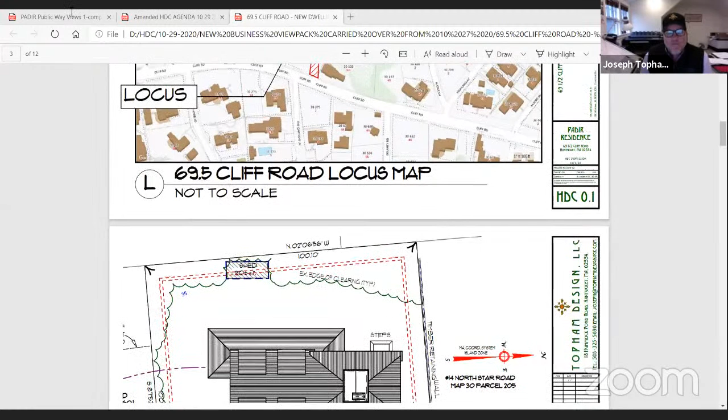Again, this is a new structure that's going to go on an existing foundation, so we're not relocating anything. We are taking the first floor framing off of the southern mass and going up with a story and a half. There's a two-story element to the rear, the north side, where the roof walk is now. That is going to go up to a story and a half or a story and three quarters.

Holly, do you want to go back to those photographs, please? So I put in a request for, hopefully, the board members could go do a drive-by of this site to show it's almost invisible. And if you made it, thank you. If you didn't, here's some photographs to help show the site. So this is from Cliff Road looking down the way, and to the right — sorry Joe, right now we're in between photos. This is about halfway down the driveway, and you still can't see the Padir house.

So this is now on the Padir. Joe, I'm sorry to interrupt, but could we go back to the very first photograph? I have to ask you a question about that one. Shoot. Holly? It's thinking. Whose screen share is this, Holly's or yours, Joe? Holly's. Okay, so this is the drive-in. So the building I'm looking at just past the hedge with the dormer with the two windows in it, is that the house?

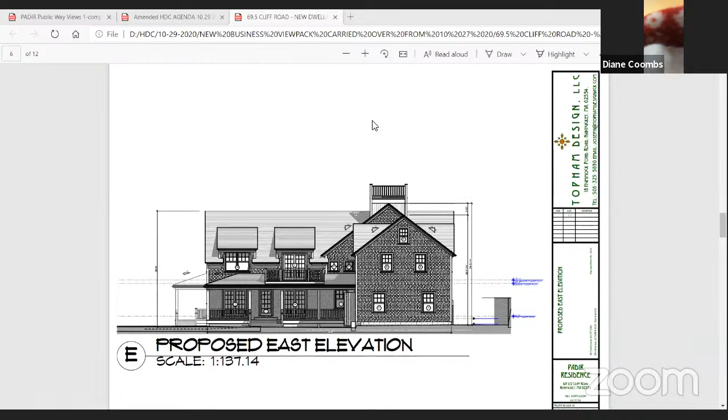So is east, other than the roof, there's no part of this that's going to be visible, right? Correct. Okay, so the windows and stuff like that doesn't make any difference. So could I go down to the next, if it's just the roof, and you're not going to see the 1.5 story because it's below the visibility line, then I don't have anything to say except the suggestion that the roof walk be removed to keep it under the 30 feet and to keep it not so visible. I'd rather see a chimney than the roof walk.

Okay, so I am going on the proposal that nothing but the roof can be seen from any direction. I think Joe's demonstrated that pretty well, and Carrie has as much as said the same thing. Right. Okay. Thank you, Diane. Carrie, why don't we check in with you? Where are you on this?

You're muted, dear. Hang on. Sorry. There you go. Okay.

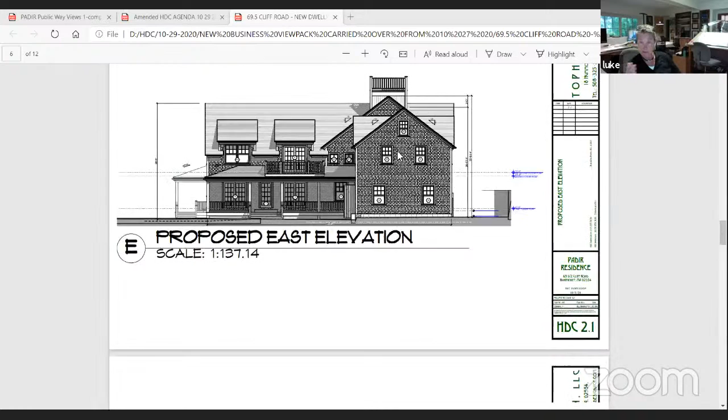I think it's a decent looking house, and even if some of it is visible, I don't see anything wrong with seeing this house. Some of the windows on a few of the elevations seem small, but again, I don't think it's inappropriate. And the house behind it, when I drove by, I went really slowly to see it, and the house behind it was standing out. So I think this house will maybe match or even still be lower than the house behind it. So I'm in favor of this.

Okay, thanks, Carrie. Abby? Yeah, I drove down here too, and I think my only objection was this elevation that's viewing now, the east, that the windows seemed sort of randomly placed. And I agree with Diane, I think the one reason the roof walk would look strange is because it is so low from other vantage points. It might look like it's just, I don't know, if you can see the roof walk, it's going to look sort of strange, sort of hanging in the air because it is so low. It's going to be at a viewpoint that's going to be strange, I think. Other than that, oh, they're not anymore.

Okay, thank you, Abby. John? John? Yes. There you are. Okay, and in looking at this, could they enlarge that just a little bit? It's hard to read the writing. Could they enlarge the photo?

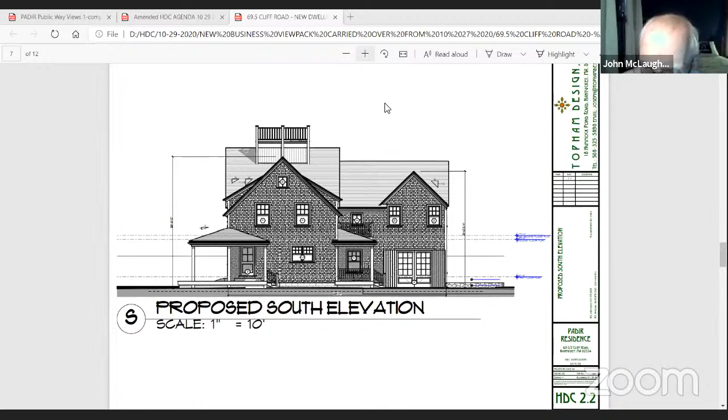Holly, we need to get you some more firepower. It seems like everything's moving in slow motion. There we go. Okay, thank you.

This is 28 foot, whatever many inches. Looking at the proposal, this structure is so much above the 7-inch minimum roof pitch. This part has to have an 11-inch pitch. You could drop that down quite a bit if you put all 7-inch or 8-inch pitches. That 2-inch makes a difference. Nobody has proposed looking at changing these roofs to a little less than what they are. That's my comment, thank you.

Okay, thanks, John. Like Carrie, I think this is going to be of such limited visibility that I'm fine with it. And even if it were visible, it's still not an unattractive building. As regards the roof walk, I think there might be a little controversy there. It does look a little odd. I don't think it quite meets the 1/3 of the ridge line criteria for roof walks, but because it's so distant, I'm not terribly concerned about that. So can somebody give me a motion of some kind on this?

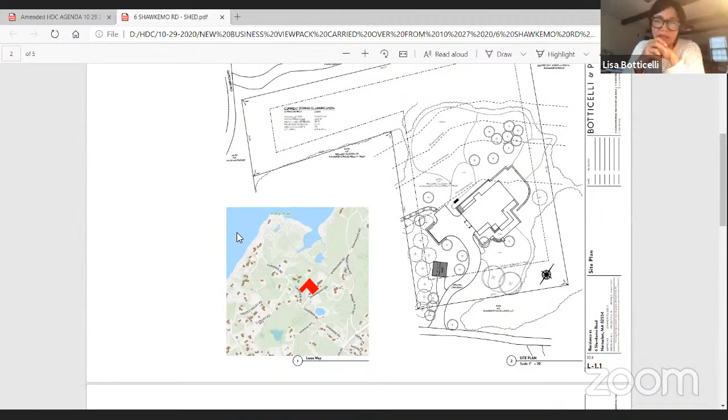Okay, Lisa. Hi, everybody. This is a very simple application, it's for a shed on 6 Shawkemo. It's a little unusual, the shed, but you approved one at 4 Shawkemo. Just to refresh your memory, Shawkemo Road is the road that comes off of Gardner that dead ends 2 doors down from this, so it's not really a thoroughfare of a road.

And the existing house at 6 Shawkemo is an old timber frame barn that's been there since - I think Design Associates built it - so it's probably built in the 1980s, late 80s early 90s. So the shed is sort of a take on that. It's a little bit more of a rural sort of lean-to shed.

Okay, I don't know if you want to go through the drawing. Can we see the elevations?

Here we go. So, Val, I'm still trying to look at it. Hold on. I think if there's no visibility, it's okay.

Lisa, what do you think about the... I'm not going to say visibility, it's no visibility, but it's very limited. I think that visibility would be very limited. You might be able to peek in there going down the driveway and see it, but there's a lot of vegetation. So if you guys wanted to view it and look at it, you could do that.

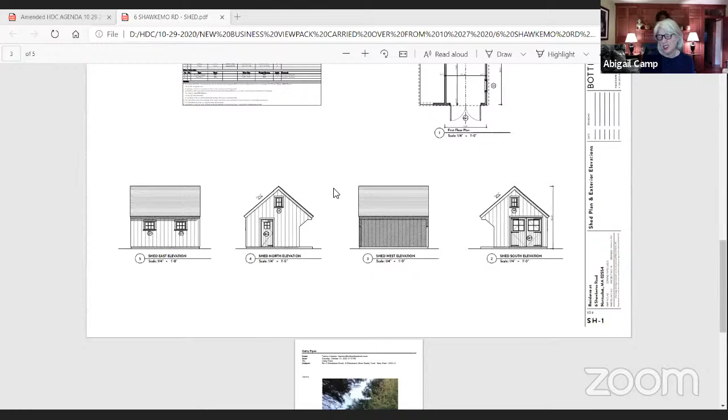Yeah, I think that might draw a little bit more attention to it. So, yeah, I wouldn't mind if it was just a regular shape. I think the lean-to - I mean, we did get the lean-to approved at the house next door, number 4. I think it's something that she's very interested in preserving.

All right, Stephen. Yeah, I'm fine with it as it is. Thank you, Madam Chair.

Yeah, okay, well I think that's fine. I think also we could have you look at it when they build it, which might be a year from now, and then talk about the detail at that point if it's really visible.

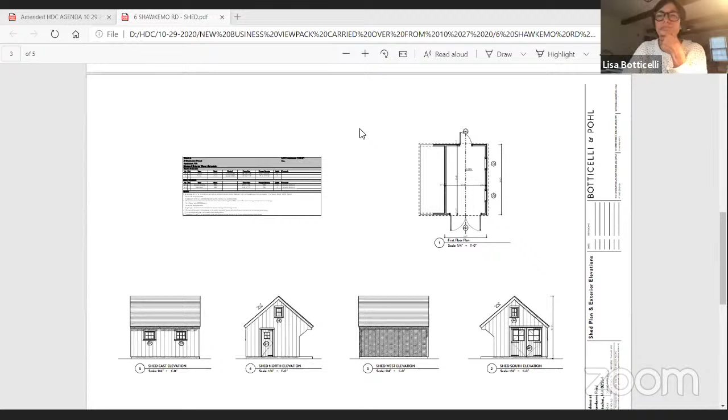Aye. There was a motion, right? Yes, so the motion passes with 4 for and 1 against. Thank you, guys. Thanks, Lisa, see you soon hopefully.

Okay, next up is 3 Brooks Farm Road, hardscaping, Scott's at Gardner. Do we have Marty or anybody on board?

Kathy? He wasn't here on Tuesday. I saw him in the waiting area, I thought I saw him. We all have bad connections today, yeah the phones are really bad. Oh, I see something that says Marty. Marty, you're muted, friend, if you can hear me. Marty? Marty, we're not getting you, bud. Hey, why don't we hold this one until we can get him on, then we can come right back. It's unfortunate because he's sitting right there. I don't know what's going on.

Thank you, everybody, for your time. So this property is at the end of Brooks Farm Road. Can we get a locus first so I know where this actually is? It's off Westchester. Where off Westchester, you know where Phil Manella's neighborhood is? No, can I just see the locus? Yeah, I just saw it in the lower right-hand corner, it's not there anymore, there it is. Gingy, Westchester, Pilgrim, okay got it, thank you.

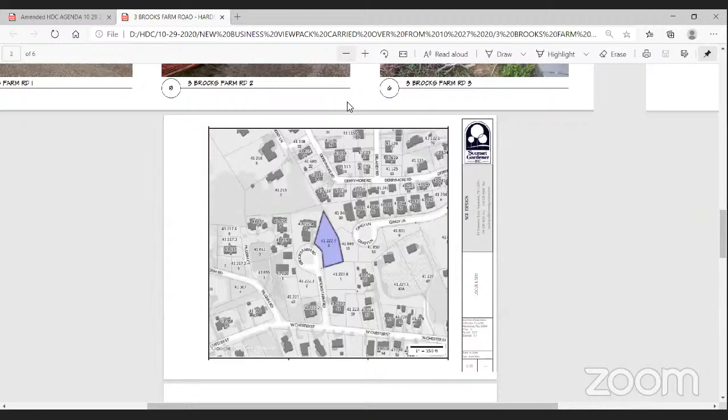Okay, so Brooks Farm Road, a little cul-de-sac off of Westchester, about 6 houses. The back of the house abuts Mr. Manella's, who is about 6 feet higher. The house we're looking at, Marty, is that your house or Phil's? That's my house, yeah, it's your house. Okay, so as you can see, it's up in the air.

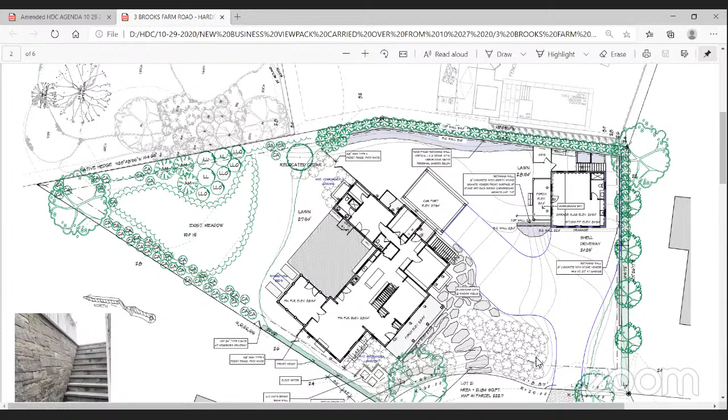I've got a rolling landscape there, covered with flowering shrubs and a little bit of grass down by the edge of the road, mirroring the rest of the neighborhood. On the left-hand side of the yard, there's a tree I'm trying to save, so I want to put some stones around it to protect the root base, using a native rubble stone. Equally in that corner you'll see the compressors illustrated, which allows me to plant that whole area out really nicely, with privet on the sides. On the right-hand side of the garage, there's a small retaining wall that mirrors the retaining wall on the opposite side in the neighbor's yard.

Marty? Which side does the retainage face - are you cutting in or building up higher than your neighbor? Can you see, in the middle photo, the garage on the right-hand side? Yes. Okay, thank you. On the right side of that there's a 21 to 24 inch tall granite wall. Is there already one there, or are you proposing it? No, I'm proposing it. But what I'm saying is, is it stepping down to your neighbor or up to your neighbor?

The neighbor - actually, their driveway and our driveway are at the same height, and they already have a 2-foot retaining wall on their side. So we're putting a 2-foot one on our side and keeping the privacy plantings that they put in. I'm still not understanding - if the neighbors already have a wall, are they lower than you or higher than you? They're lower. So the retainage is facing the neighbor? No, the retaining is facing our driveway. It would be helpful if we had some topography. Yeah, I'm sorry we don't have that right now, but the driveway they have is 2 feet below the existing grade on the property on the right side.

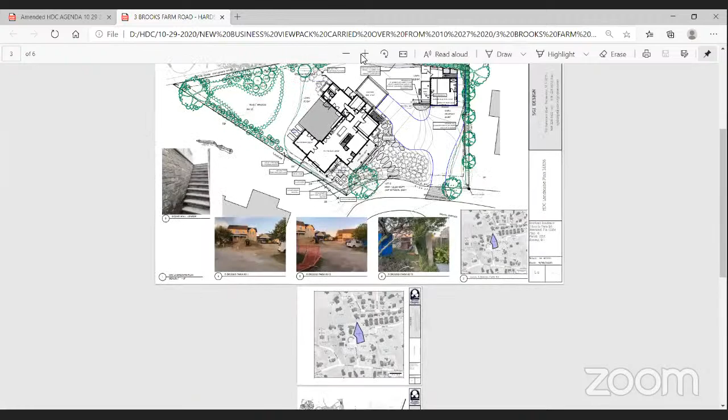On the right side of the plan, that's from where I'm looking. Can you go to the plan, please? Okay, yep.

Can I click on that, Ray? Click on what, the plan? I don't know, I think this is Holly's screen share. Okay, so Holly, where it says, I'm sorry, the plan is upside down in reverse for me.

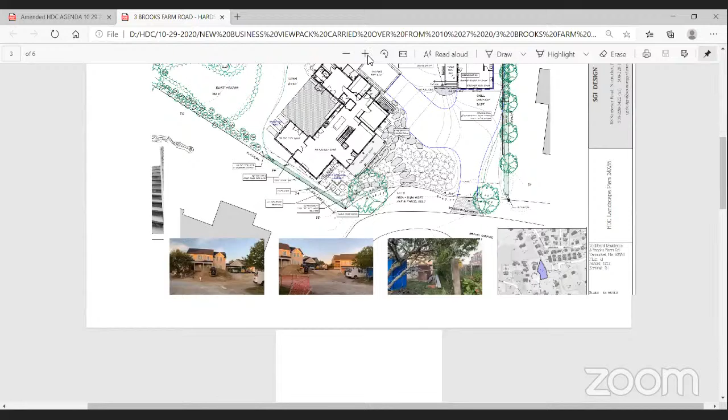On the right side in front of the garage, there's a statement. We're getting the echo again, Marty. Can you hear me now? Holly, can you please move the thing over to the left so that I can see the retaining wall? Thank you.

You see, Ray, where the number 105.72 is? Yes, okay. To the left of that there's a straight line, and that's the retaining wall. Yeah, I know where it is. I'm asking you, and I think I got an answer, that the retaining wall is facing your neighbor. No, the neighbor has another wall on their side with their house. So your retaining wall faces into your property. Yes, it's only seen from our side.

Okay, and it's 18 inches high. No, it says maximum height of 27. That's way in the back corner. Okay, all right, continue.

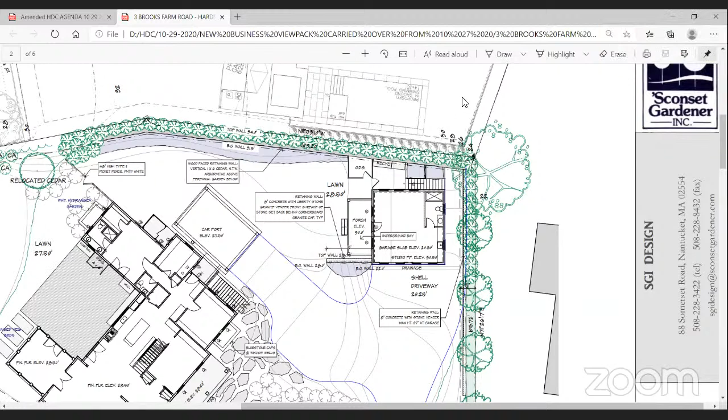Right, so your neighbor is 8 feet above you. Marty, look, I see a bottom of wall at 31.5 and a top of wall at 34. That's only 30 inches of height, not 8 feet. We're talking about the retaining wall that's right next to the garage. Marty. God.

I think, Mr. Chair, maybe we've spent so much time on this. What were you going to say, Val? I was gonna say, I know it was on the view pack, but maybe some people didn't get to see it. We could request more photos and more information, perhaps the topography stuff, and it will be clearer to us, maybe more photos of what's actually there, like on the property.

So Marty, if you hear us, I think we're going to motion that we hold for more information and another view. Okay, and can I make a suggestion? That the property behind this particular thing is up there on Gingy Lane, and it goes down, drops down to Brooks Farm Road, whatever the name of it is. Perhaps we should know that, because it must be an 8 to 12 foot drop from Gingy Lane down. It is, that's correct. Okay.

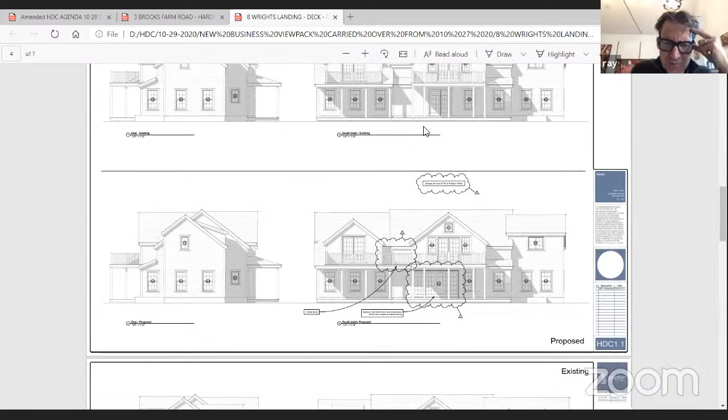Okay, so this is the rear elevation right here. We can't read any of those notations. We're attaching the 2 second floor decks, joining them, and then replacing the 2-panel French door with a 4-panel French door on the first floor. And this is all in the back, Ethan? Correct.

Well, there's one more thing: changing the trim color, joining the decks, and 2 to 4 doors, correct? Correct.

Okay, board members, I'm okay with this application, Mr. Chair. Thank you, Val. Abby? Me too. Diane? Yeah, aye. John, are you okay with this?

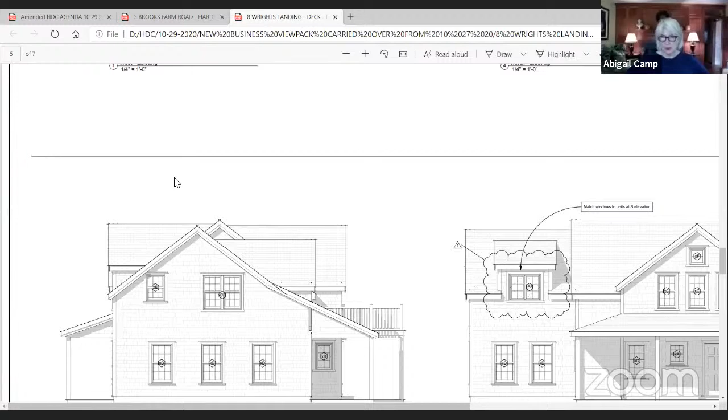The only thing I would say is the length of the second floor deck. I'd like to see the other end of it - how much extension does it come off the wall? Oh, you mean the side, from the gable end? John, that's existing. Okay, I just caught it.

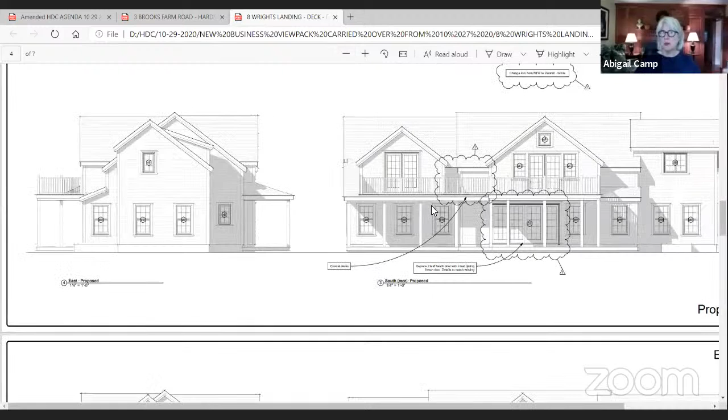All right, so can we have a motion? Val made a motion to approve. Well, I said I was good with it, but I'll make the motion to approve. On that motion, Abby, aye. Diane, aye. John, aye. Aye, I'm in favor. Okay, Ethan, that's it for you for now. Thank you very much, guys.

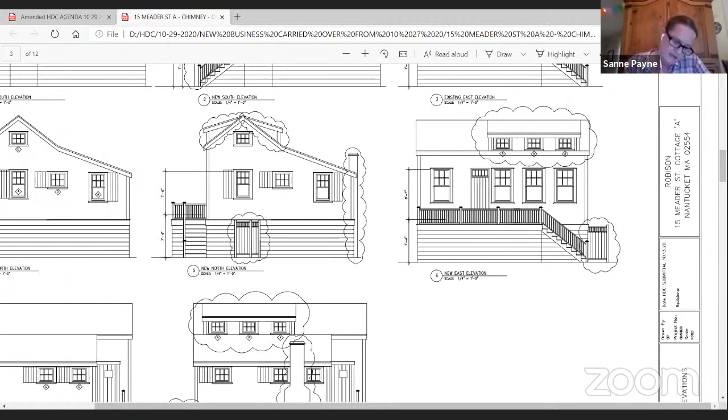Francis Street has changed so much, it's hard to think. How tall is this building? Total height is 24 feet 5 inches. It is quite a bit above ground level to start with, up above because of the flooding.

If we move the dormer on the east, then what happens to the dormer on the west? Would another cottage block off your view? It faces Cottage D, so you would be able to see it from Cottage D, but Cottage D is the same height. So all those are right around the same, within a few inches of each other. You can see it from Cottage D, but that's pretty much the only place you can see it from.

Maybe you can't see it. We moved the dormer over a little bit to the left, so it sort of matched the dormer on the east. Would it not look better balanced than leaving the dormer on the west over to the right? Leaving the dormer on the west over to the left-hand side, which is above the loft, so if the board would be okay, maybe on the east side...

Let's hear from all the board members before we get into this. I also don't see anything. I don't either.

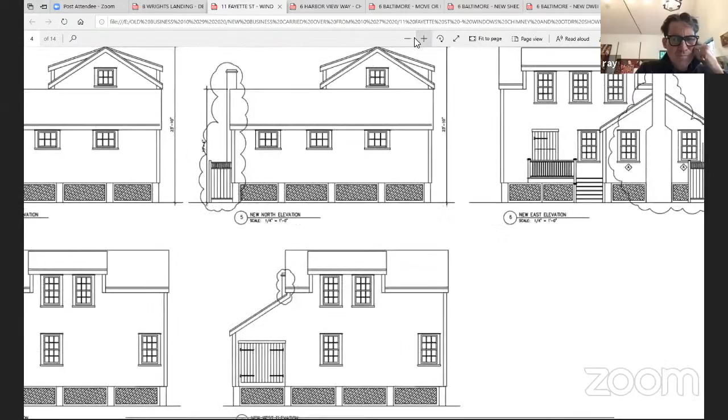Sanne, if you're going to make an argument for something else being in the way, it would be important for us to see that thing. Well, this isn't even the same plan that we were just looking at. This is different, this is 11 Fayette Street.

My overarching comment would be, all of these buildings are, first of all, raised up, as we all know. Hang on, this is Harbor View Way that's on now. Okay, here, there was Meader, go back.

Sanne, if you can hear me, you're suggesting Cottage A is the one under review, and you're saying that the dormers on the west side will be blocked by Cottage D, right? Sana? Maybe she's on mute.

This meeting is really not working. That's not working at all. Are these the cottages that they built up, we did with Paul, or? Yes.

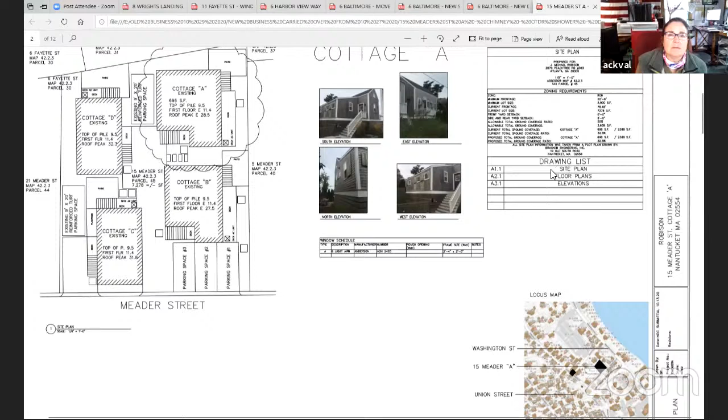They're around the corner from Diane's house. I don't see Sanne on the participants list any longer. I would just ask that perhaps we put this on hold. We're just totally wasting time here. So Sanne's exited the room.

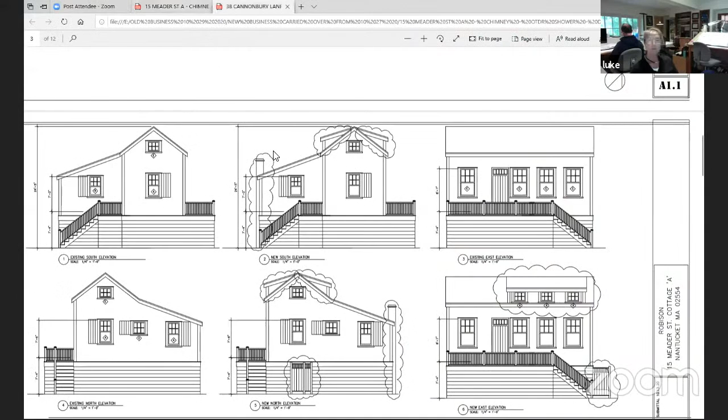This is the subdivision on the way out to Low Beach Road, which we've seen a lot lately. I have a few examples on the front page of houses in the area, and I think this house will fit in nicely. It's 27 feet tall, towards the back on the left, with dove gray trim, black sash, Harvard slate gray ICO roof shingles.

Ray, I think you've got to get Steve Welch on this. I think I've got to recuse. Oh, okay, so that's fine. Stephen, are you okay, ready to go? All right, great, thank you.

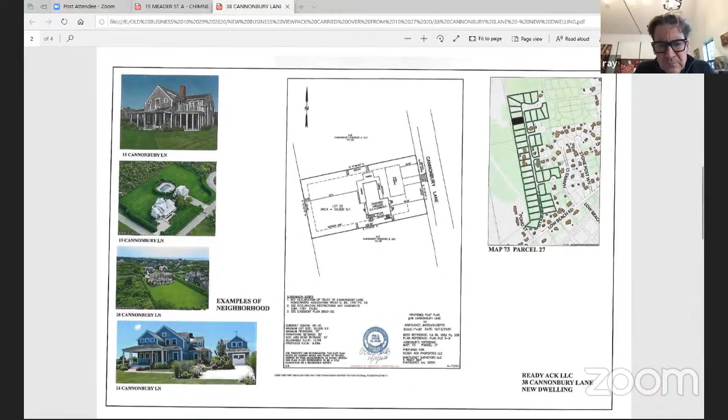Any comments from the board? What color are the roof tiles? Harvard slate gray, it's one of our approved colors. Okay, thanks. We've got to see the elevations, let's scroll back down to the elevations.

Stephen, were you about to say something? No, I'll hold, thank you Mr. Chairman. Okay, the only thing I was going to say was something about the ganged windows over the front door, but I don't really mind them. I just think they look a tiny bit odd, but that's all I have to say.

Oh, okay, and they're not actually ganged, there is shingle space between them. Yeah, I don't know, well maybe they should be ganged. I don't know, okay. Stephen? Yeah, I am fine with the application as submitted.

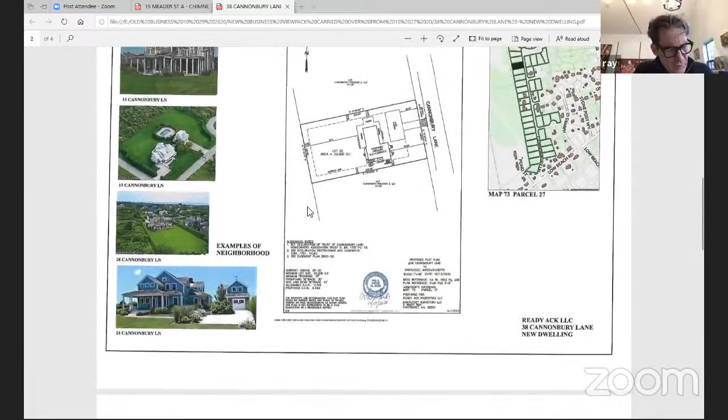Okay, thank you. John? Yes, Mr. Chairman, could you go to the aerial shot please? Sure. Right there, where it says 17 Cannonbury. Yeah, so that's not actually this house, John, that's a neighbor's house. No, I have a comment about it though. Seeing it from the aerial shot, that it's screened around the pool, so you can't see it, which makes sense. But the point is I'm trying to see, let me see where it is there.

Most pools being approved, there's no low brush there, you know, and this enclosure right off all four sides is not visible. Maybe you should do more of that kind of thing. Yeah, that's noted for the future, John.

Do you have anything to say about the house design? The house design, I can't find anything wrong with it right now. Thank you, okay, thank you.

How about you, Diane? I think he thinks the parking space is a pool. Yeah, I bet that's it. No, I think he was just making an observation that this is a good way to handle screening a pool when you get the vegetation up close, and he's correct. Anyway, I would approve as submitted.

Oh, do you want to make that motion, Diane? Because I think that motion would carry. Yep, I make the motion that it be approved as submitted.

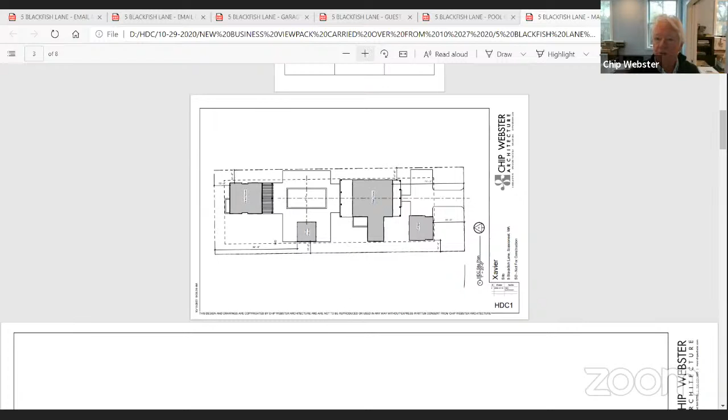On this drawing, on the right-hand side is Blackfish. So the arrangement, you can see it's a long, skinny lot. It has short frontage on Blackfish, and then it's very deep. So the arrangement of the structures pretty much has to be linear fashion because of the size and shape of the lot.

We are proposing to put the garage in the front with a side-facing door, which is pretty common throughout Sconset, in both historic applications as well as some recent approvals on new construction. That also gives us the opportunity to set the main house back a little bit more, so there's a front porch on the main house. Then to the rear is the rear courtyard bracketed by the main house and the guest house. And then there's a proposed pool cabana next to the pool. So that is the proposed arrangement.

There were some Sconset Advisory Board comments, which I'll pre-address. I'm sure Holly will read them, but one was relative to the garage being in the front, a question about that. I did, after the Sconset Advisory Board had their meeting, do a tour, and I have tons of photos which I will submit of the garage in the front. I want to point out that the garage has the door facing the parking area, not the street.

The second comment brought up during Sconset Advisory Board, if we go back to that perspective drawing of the main house, was that the door is not centered on the first floor, and that was a concern of one of the members. Again, when I drove around, I found numerous examples, both historic and new, of applications where there's a symmetrical second floor separated by a porch and a different arrangement on the first floor. In fact, that was more common than the other way. So I just wanted to pre-address those 2 comments.

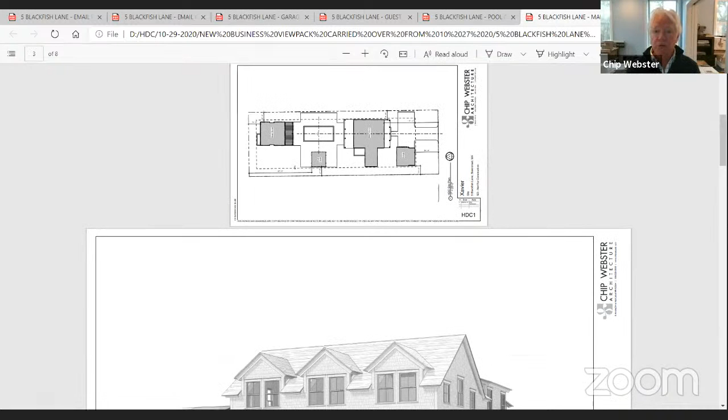If we go back to the site plan for a second, there were also 2 abutters who submitted concerns on this, and maybe I'll pre-address those as well. Both members were concerned about the amount of ground coverage on it. I'm actually glad they pointed that out, because we did a double check, and they were correct that the ground coverage as submitted exceeds the maximum.

So we have already done a redesign on a couple of the structures, the guest house and the garage, to conform to that. There was also comments from both neighbors about water runoff from the property, and we have alerted the site engineer to make sure that they are considering that.

And then one of the 2 neighbors, if we go back to the site plan for a second, are 1 Blackfish and 38 Burnell. So they're both on the same side of the property, and you can see there, right where the cursor is. And then one of them asked if it might be possible to move the buildings further from that side. So those were the comments from the neighbors.

So one thing that might speed things up today is both the garage and the guest house are redesigned enough that I think you could just hold both of those for revisions. But I would like to look at the main house and get feedback on the main house and potentially the pool cabana today.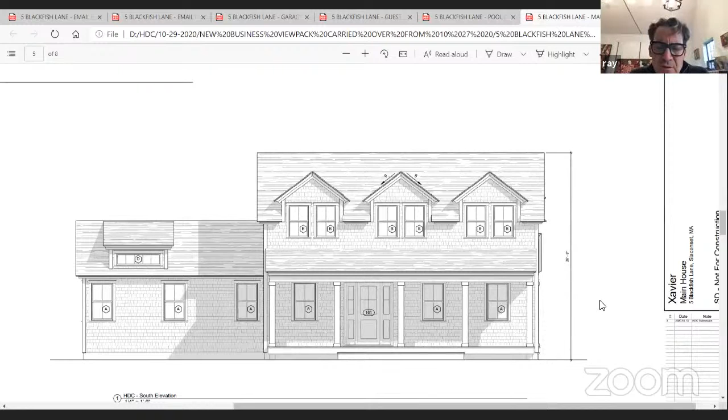Chip, did you give us the colors on this? Yes, shingles are natural to weather, red cedar roof, and white trim. Okay.

Here on the top of the page, you can see the west elevation that would be facing the sideline towards, I guess it's 7 Blackfish or whatever the next lot is that direction. And then at the bottom, you can see the north elevation, which is the back of the house. Okay.

All right, thank you. Board members. I'll go, Mr. Chair, if you're ready. Val, go ahead. Chip, nicely done, I think.

The only concern I have is the transom dormer on the side facing the street. Is there any other window type or arrangement you could pop in there?

It's interesting that you bring that up, but that is an element that appears elsewhere on another building in Blackfish, where there's a 1-story mass with the transom. So it is a condition that exists. We absolutely could look at something else. It could be a gable instead, which would tie into the other gables. It is, that's a 1-story room, a 1st floor master, so there's a cathedral ceiling there, and the idea was to break up the ceiling line and get some light in.

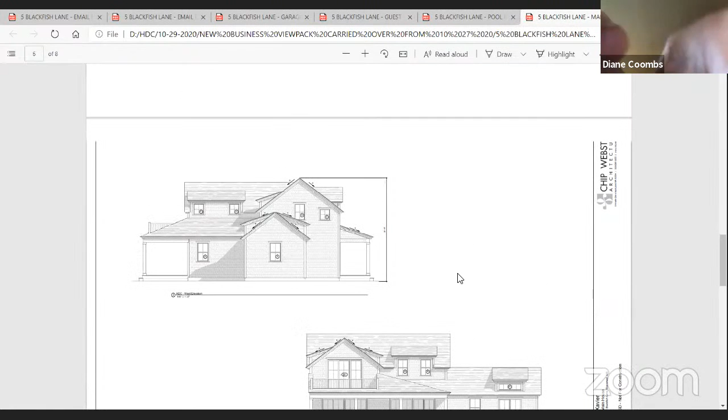I'll make a comment as to the windows that are mulled. I think they're separated, at least from the drawing, with a course of shingles coming down. So I would be the first one to leap up and down about mulled windows, but I think they are okay. I think the mulled windows on the east elevation are... I don't know. They're not typical of any window there, and you have plenty of space outside.

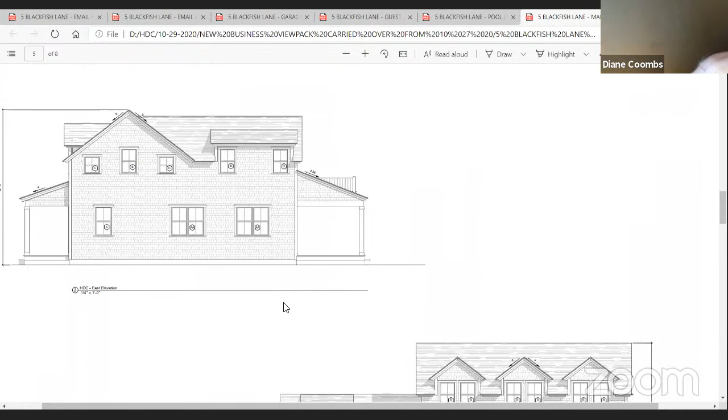I would rather see them separated along the bottom and come underneath the windows up above. I think, what do you think if you wanted to keep the little one over the bedroom, the 3 in that little dormer, what happens if you stretched it all the way out over those windows? Would that be something you could do? Would it look better than if you put a gable dormer in there, it's going to project above the roof and you're trying to keep it low. So that's just a suggestion.

I'm sorry, Diane, I might have missed that. I followed your comment on the mulled windows and then. Okay, on the south, Chip, on the south elevation.

South elevation, okay. The D window, you said that was a bedroom with a cathedral ceiling, right? What happens if instead of just having the 1, 2, 3, 4 windows, you stretched it until it went over the A window to the left, not covering it, but went over it just the way it does to the A window on the left. So it was longer rather than just a peak on that roof. Okay, I follow that. I think that we could do that.

And that might address Abby's concern that it was feeling a little small, maybe. Right. And it wouldn't project up over the roof as a doghouse would do. So that's my suggestion.

Okay, thank you, Diane. John? Yes, thank you. Is the south elevation that you have there? Yes. I think the door should be changed and not have so much glass in it, the front door.

That's what I'm thinking about. It's out of character with those side lights for that style building with those 2-over-2 windows. Big difference between them.

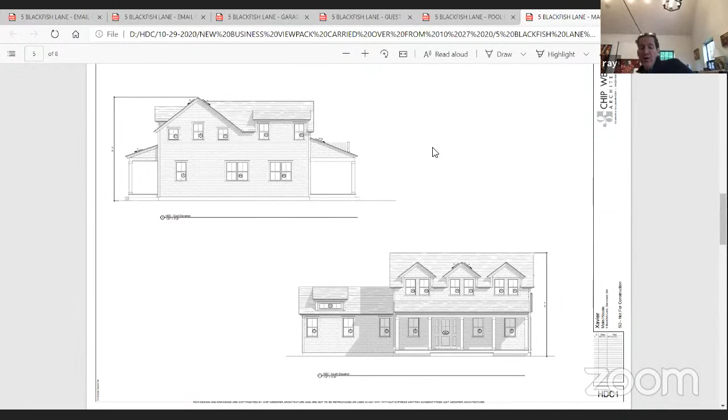Thank you. Okay, I actually agree with John on the front door. Its placement is fine, it's centered like the windows are within the bays created by the columns, so that works for me. But usually we're either approving glass in the door or with side lights, but not both. So either you have a nice big door with glass in it or you have side lights, but one or the other. That's the extent of my comments.

What would we like to do with this, folks? Hold for revisions? Was that Abby? Yes. Okay, so Abby, you've made a motion to hold for revisions. So on that motion, Val? Aye. Thank you. Diane?

Aye. Thank you, John. Aye. Thank you, Abby. Aye. And I'm in favor, motion carries.

So now remind me, Chip, do you want to hold the guest house and the garage? So items 20 and 21, can somebody make a motion to hold those for updated information?

Motion to hold. And then, if I may, it might make sense at that point to just have the pool cabana track with the rest of them. Okay, why not? So why don't we just do all 3 then?

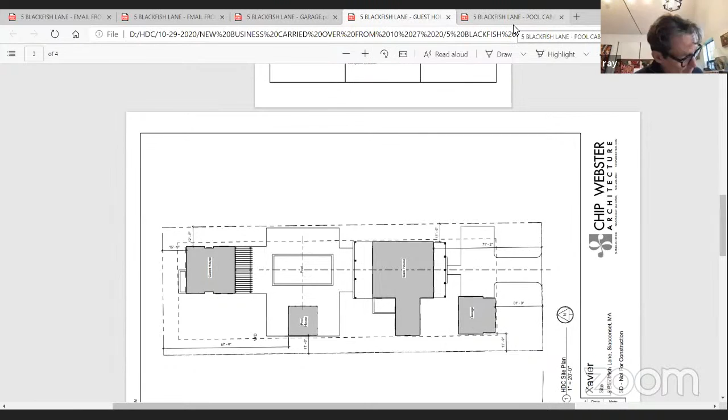Val, why don't you just do a motion that says have items 20, 21, and 22 track the main house? That's my motion, Mr. Chair. Okay, thank you. So on that motion, Diane...

Aye. Abby, aye. John, aye. Val, aye. And I'm in favor.

Okay, so that is it for you, correct, Chip, for at least now? It is. Thank you very much. Okay, everyone have a beautiful day. Thanks. And now we're on to 82 Millbrook Road.

Tori is here, she's in the building, actually, here at Plus. Hi guys, I'm here. There you are. We might be able to actually get to some of this old business stuff. That would be crazy.

Can you tell us anything about this, Tori? Sure. This might be a good place to start, at the last page of the elevations, where you can see the comparison of the garage and the main house to the proposed second dwelling as a starting point.

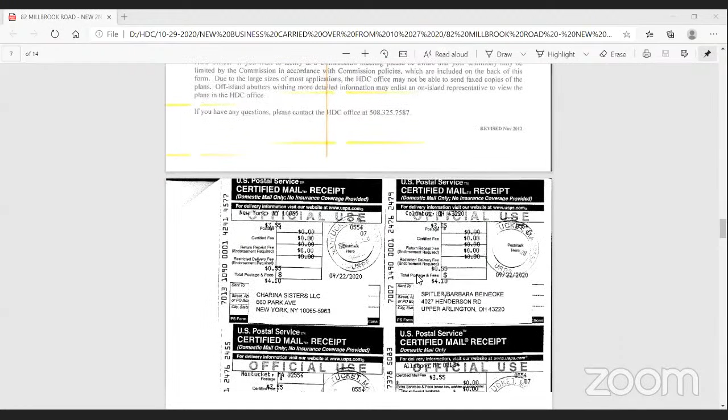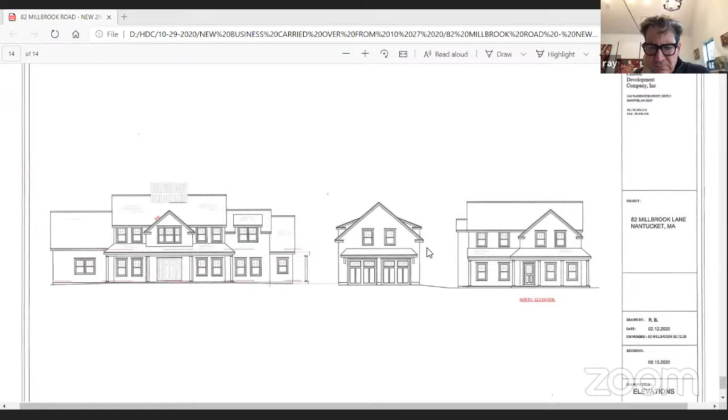So now if we'd like to go back to the site plan. You can see that we're wrapped way inside to the interior of the lot and barely visible from the main road.

Well, okay, can you explain something to me? Yep. The diagram that you just showed us is essentially like looking from, I believe, the north, looking south, which is somebody else's property, that's not a publicly traveled way. So people aren't going to be looking at it that way, correct? No, not at all. That was just to give you a reference point for both buildings that already exist on the property. Okay.

But our visibility in this case is from the east. If at all, yes. So the 'if at all' part, do you have photographs of the site and the house? I do not believe those are there. Well, you won't see the house from the east. It's actually, as you come around the curve of Millbrook Road, it's going to be from the south, if anything, the rear of it.

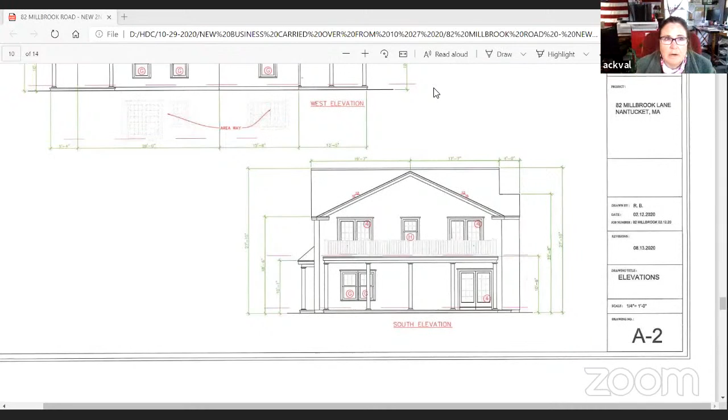I did go out and view it, and there is visibility depending on what time of year, of the structures that are there, primarily the house, not the garage. But a more overarching concern for me is that this house, a secondary dwelling, is almost 28 feet tall. I know we've sort of loosened up on our second dwelling being 24 feet and all of that, but this I think is a bit of a reach, and that also will be the part you see, the second floor level.

Mr. Chairman, let's make sure Val is finished with her comments, John, and then I'll take you. That's it for now, Mr. Chair. Thank you, Val. John. Yes.

Looking at south elevation. Okay, whoever has - sorry John, I'm going to interrupt you just for a second, somebody has like a truck backing up, I'd like them to mute. Go ahead, John.

On the south elevation that I'm looking at - could that be made a little larger? Holly, can you - oh, there we go. Okay, there we go. There you are, John. All right, now what is it?

It's got a 5-inch pitch on it. It's hard to read. 5 and 12, John. It is a 5? Yep. All right, that should be changed to a 7, no matter what problem they have to do. At a minimum, yeah, they're creating their own problem. Now, am I looking at it? It looks like the second floor deck is superimposed.

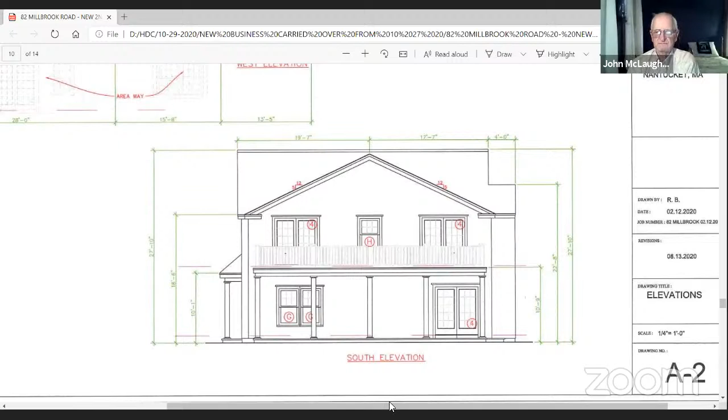I'll make a motion to hold for revision. Okay John, I'm going to hold that motion just so that if there's anything else Tori needs to hear from other board members, she's got the full package. Okay John? But I totally agree on the roof pitch and the deck. Let's see, so we heard from Val.

Abby? Yeah, having listened to everybody else, I think that roof line isn't going to work on the south. Maybe some shed dormers come down and cover the French doors, maybe there's a little one in the middle. And it sounds like you've got to bring the height down for a second dwelling - this is almost 28 feet.

Well, we're stuck on this elevation. I'd kind of like to see one of the sides, so that would be east or west, if possible please. Yeah, oh that's deep, yeah, the porch is very deep. Right, so that's got to be changed.

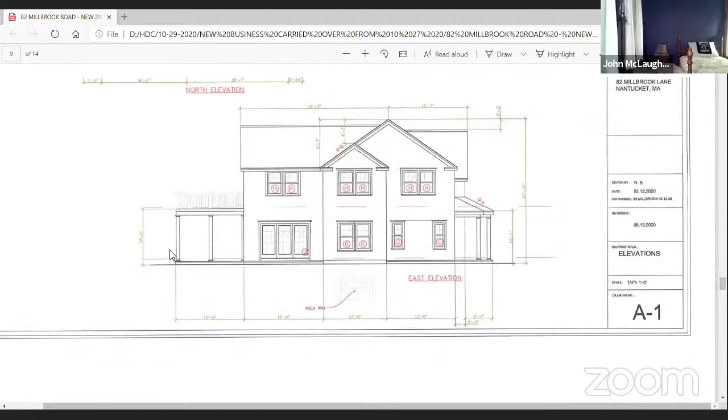I was looking at that hip roof, the way it looked from the south elevation - it looked a little steep. I don't know my roof lines on hips like that, but it seemed a little steep from the south. And then east. Yeah, someone's gonna say something about those ganged windows, I'm sure. Yeah, so, yeah, I guess those are my comments, and I think holding for revisions is probably a good idea.

Okay, and John has made that motion, so I'm just sort of holding that motion. I'd like to - yes, yes, I get - Diane. Okay, well, Abby is right.

On the east elevation, every window on the second floor is ganged, and on the first floor, and the triple French doors, and the deck above. The house should only be - and we've got to start sticking, sounded like Johnny, what he said is true - we should be sticking to 24 feet for a house that is a secondary house that is not a garage. And this is not 24 feet. It's completely ignoring our rules and regulations.

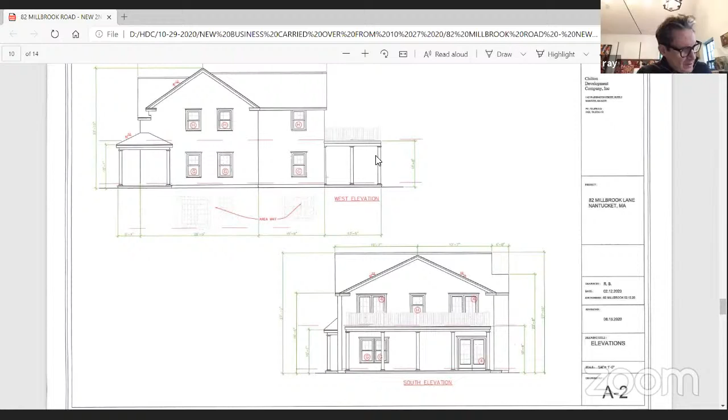Okay, so there is a motion on the table to hold this for revisions. And on that motion: Diane, aye. Val, aye. Abby, aye. John, aye. And I'm in favor. Motion carried.

Ray, could you just explain the one comment about the railing in back? Is it the width of it, or the style of it? It's the depth. But did John say something about the railing? Well, just the fact that on that drawing we were looking at, the railings were very unclear. So the line weight needs to be stronger. It's kind of a mess, yes.

It's the roof pitch and the ganged windows and everything that we said. It's the height, just trying to confirm. Okay, we're moving on to another application. Thanks, we're on to old business.

21 Hummock Pond Road. It's myself, Diane, Abby, Val, and Carrie. Okay?

Hello. Hi, I'm Pete Sendelbach. Should I present it? Can you hear me? Okay.

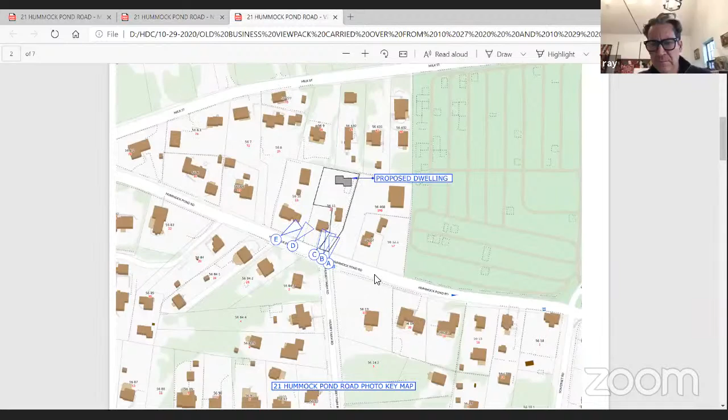So I think it's safe to say that it's not visible from A, correct? Well, that's the view coming up Hussey Farm Road. For B, you can just see them from this view, either side of the chimney on the garage there. Wow, it's pretty far back. Okay, those are your two ridge poles, correct? Correct. Okay, very good. Thank you.

Okay, there's our—that's the same chimney, correct? Correct. That's a chimney on Milk Street Extension there. Right, so the poles are somewhere over to the chimney that's just barely peeking above the privet. Yeah, they're kind of behind the chimney there. Okay, all right, so that was C. How about D?

D. Thank you. That's nothing there, right? Yeah, I can't see them there. Okay, E.

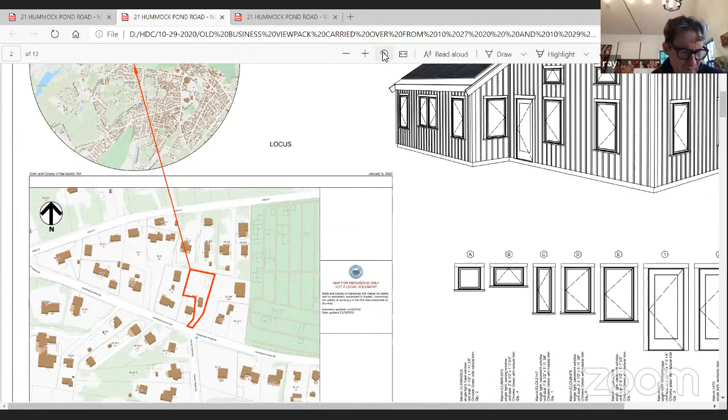So I would want to see it shingled. And I guess the solar panels are on the side facing away from Milk, so those would be the least visible in that spot, so those are okay. So just to reiterate, Val, you just want to see it shingled instead of vertical board? Yeah, and it's all casements. I think that in its entirety, it's an anomaly. Yeah, and it is—so this would be, due to limited or lack of visibility clause, I just would be concerned about all casement windows and the precedent. I think you can still get a net zero house and use typical materials.

What about the solar panels? I think where he has the house, the garage, and the other house, this is probably the best place for them, although it's on the front of the house, which we don't typically like. That I do believe is limited visibility.

Mr. Chair, point of clarification. I believe when this was last reviewed, you all discussed that it would be a separate application for the solar, that this is just for the house. Yes, that was true. Thank you for that.

However, I will say for the record, Val's point about two things: one, you have a black roof, which we're always looking for; two, they're behind the garage. So I don't think there's going to be any difficulty. Oh, they also occupy the whole roof plane, which is a third thing we're often looking for. Thank you for that, Holly.

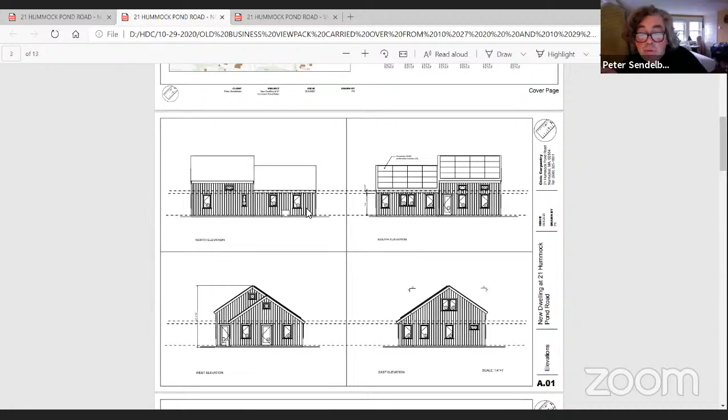Mr. Chair, I think respectfully that Val is probably mistaken about it being visible from Milk Street Extension. There are a lot of houses in the middle, and I've lived there for 12 years. I'm pretty positive there's no way to see this from that direction. Yeah, I would tend to agree. And it's really low.

A thousand feet away, I mean, or more. Can we see the locus map to see how far away this building is from Milk Extension? There you go. So Milk Street is the road. Oh, there you go, there it is. Right, thank you.

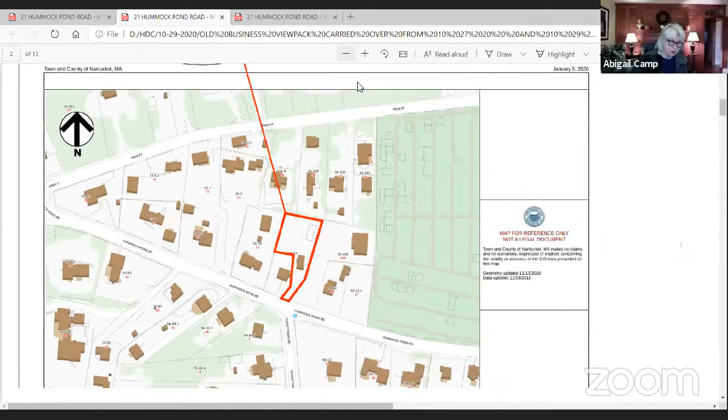So I'm fine with it. I'll make a motion to approve and see what happens. And could you just say that we're approving this with the understanding that the solar panels will be a separate application? Absolutely. It's a nonconformity due to lack of visibility, which means we'd have that caveat of, at the time of inspection.

Mr. Chairman? Yes, John. All right, I'd like to make a comment. Go ahead. This structure, as I see it drawn, I find the window considerations part completely inimical, and it has nothing to do with the present existing surroundings, which is say 400 to 500 feet from this structure where we propose it.

As it's outside of the HDC area, but I find that to approve this thing out there, you're going to start a precedent anywhere on this island, it's going to look like that. And that is not Nantucket, that is not Sconset, it's just not Nantucket. And I'm not in favor of any... I am in favor of some changes on this to make the size of it. What?

What did you say? I said you're not on this application. Oh my gosh, thank you for pointing that out. Yes, John, you are not on this application. Thank you, sorry about that. No, that's all right, you're right.

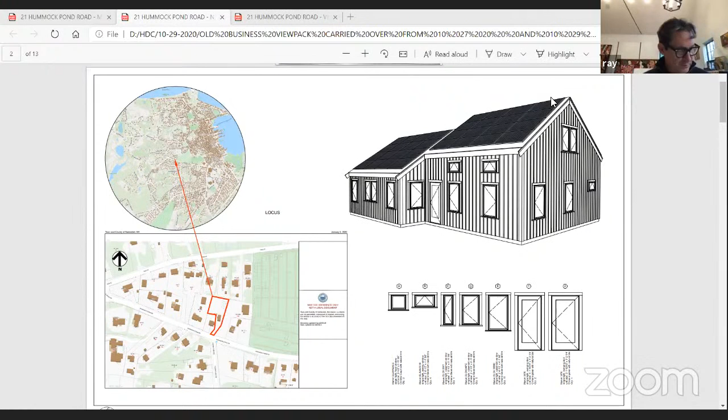Can somebody give me a different motion please, don't take it personally. Make a motion to hold for revisions. Okay, let's see how that goes. Carrie, aye. Val, aye. Abby, aye. Diane, aye, I'm in favor. Okay, so looking for some revisions.

Next up, solar panels, 83 Eel Point Road, myself, Diane, Abby, Val. Let's go, I'm running out of steam. All right, can you hear me? Can you hear me? Yes.

Okay, good. So when this was originally heard, I contended that the visibility would be low or not at all from Eel Point Road due to the new black asphalt roof, and the fact that the house is one story and 300 feet from the road. There's already a natural vegetative buffer from his driveway to the west, and we offered to add the same type of buffer from the driveway east, as well as plant a few evergreens to block any visibility from the road.

It was held for a viewing and we came back, but then no one had viewed it. And at that second meeting you requested a string marking the height of the proposed natural vegetation that would be placed there to block it. The string was put up, so I'm not sure if anyone viewed it.

But before that, I wanted to speak to the point that you raised, that the area was completely flat and any kind of berm would not be natural. Just to the east of this property is a dune, a big undulation that's over 25 feet high, higher than the height of the house. So creating a berm or high vegetation really is in keeping with the natural landscape. So again, it was held for a second time for a viewing.

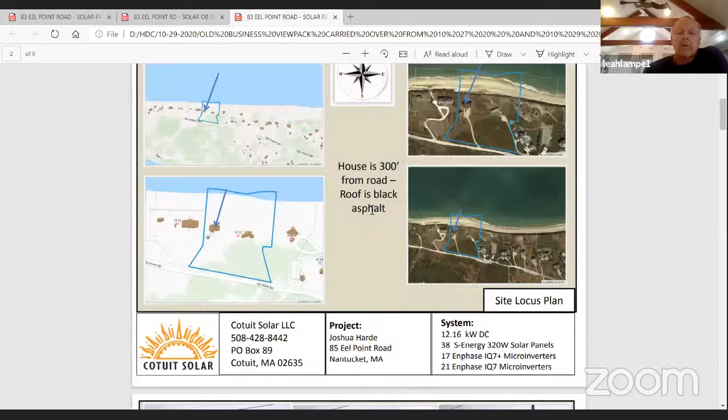It would have to be on the front of the house because that's the south, or we could do a ground mount, or we could screen it closer. You could come back with another application. But can you give me some guidance where you would want to see it? I would say wherever you decide to put it should have some screening that blocks the visibility from the road.

And did you consider doing something like a pergola? We've seen those done before and they're inset. So you're talking not on the roof, is what you're saying?

Well, I think a ground array with screening around it. Okay, I mean, that's my view, my vote.

Okay, so berm something? They could berm in front of it or something. Well, somebody on the board told her not to berm because that was artificial, but okay. I'm not sure that I agree. But even if you didn't berm, you could always vegetate with evergreen material. So let's hold this for revisions, okay?

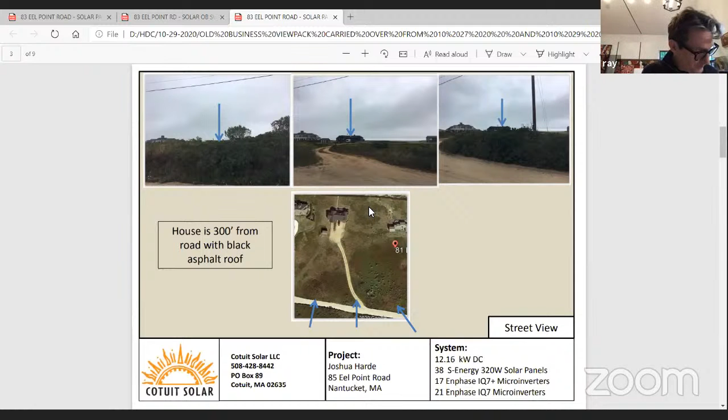Motion to hold for revisions. Thank you, Val. On that motion, Abby? Aye. Diane? Aye. Val? Aye. I'm in favor. Okay, that's that.

John Lampe, 10 Delaney, Lot C. Am I on? Can you see me? You're on, yep. Okay, so if you've forgotten, John, the board is myself, Diane, Abby, and Val, and that is for all three of these applications, okay?

All right, let's go. So I'd like to begin by discussing or addressing the neighborhood context for this application. Good. I'll express, I had sent in some photos way back in September, but for whatever reason, we didn't see them.

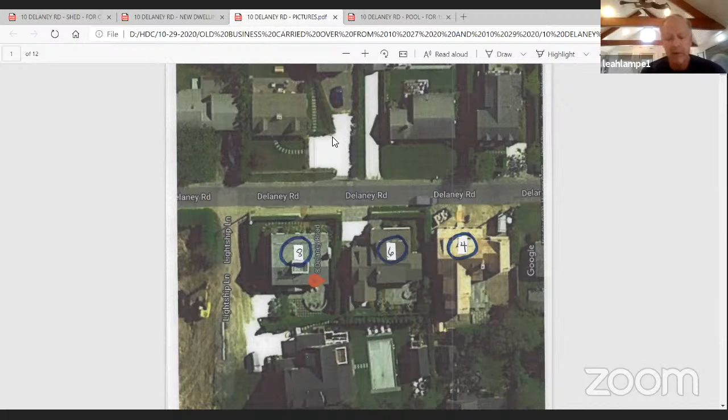So number one is a Google map satellite shot of Delaney with number 4, 6, and 8. And you can see that they're pretty tight right in there. These are particularly, well, you can see that 4 is brand new. And as we scroll down further, let's look at the first 3 Google satellite shots.

So that is 14 and 16 Delaney, which is 2 houses away from 10. And in particular, you'll see later on a shot of 14 because they have now built a home on number 14, which was just completed about 1.5 years ago. But that in particular is really, I think they've used up their entire ground coverage less 1 square foot. And we'll see that a little bit further down the line here with the photos.

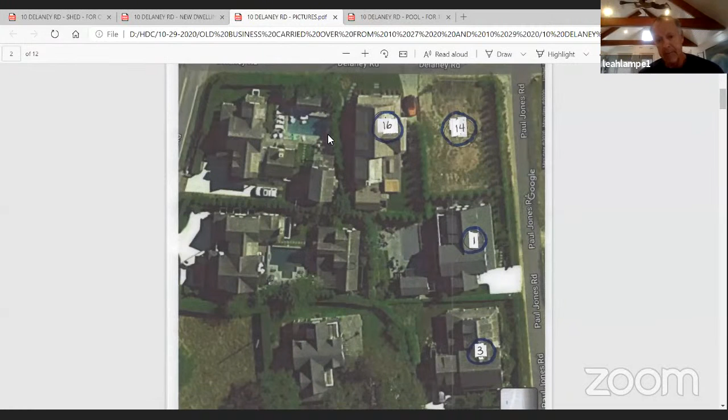And then as well as 1 and 3, they're all pretty new homes. And, you know, the neighborhood is kind of in transition. And the new homes are all, you know, they try to utilize as much of the ground coverage as they can. I mean, they don't use the whole thing, but certainly number 14 did. Gingy Lane, you can see there that those homes, which is like 6 houses away from the site going south, and all those are pretty well tight as well.

So to give you some photos of the homes on Delaney, if you move down to the next shot there, Holly, number 4, that's pretty new right there. And I didn't get the as-built of this one, but it's very close to the side setbacks. Moving on to number 6.

Next photograph, which is 6 Delaney. That one's pretty doggone tight as well, but this is also just to give you perspective of the homes in the neighborhood. Next one. Number 8. We do have an as-built. I should have included it in with this stuff, but they are right against the Lightship Lane. That's the one I just completed.

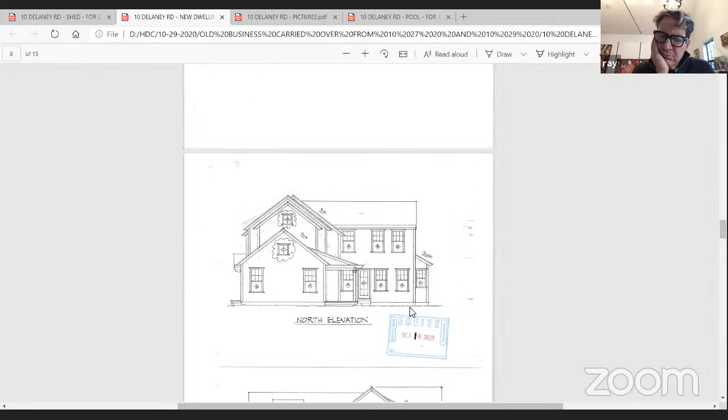So on the east, the clouded windows were both ganged, so I moved them apart. It's the second story one, a small room, and I've spread them out as far as I can in that area. The ones below were the kitchen, and that was easier to do.

So, to just refresh your memory, I moved the house more to the center of the lot, gaining 3 feet. I was on the east lot line, right up against the setback, and now I have 8 feet instead of 5'3", I think it was. And then I might point out that for this lot, I've utilized only 79% of the allowable ground coverage.

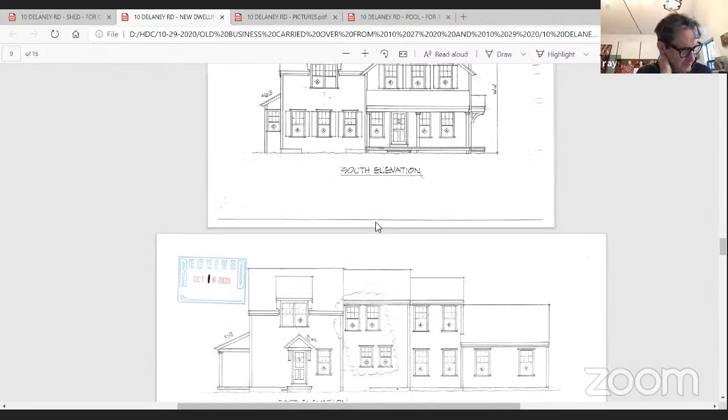I think what he's done is good. I like the windows in the north elevation. If those windows in the elevation Abby was talking about, the east elevation, I wouldn't mind those windows together if they were in the center, but that's a bedroom, you said, so you have to put windows over there, right? That's correct. Yeah, I agree with you totally. I wish I could.

I don't know, well, you could try them back to being mulled and see if they have the two on the top mulled. It's just that no way is one set over the other. Maybe a single window in that room, get rid of that window to the left and keep your single window up there. It might work out better. It's just sort of screwy, and I think when you drive by and look at it, you might think they made a mistake. Not that I don't love your stuff, John, but that set of windows disturbs me. Other than that, I appreciate you moving it, and that you're down on the side to side and back to back. I have no other bad things to say.

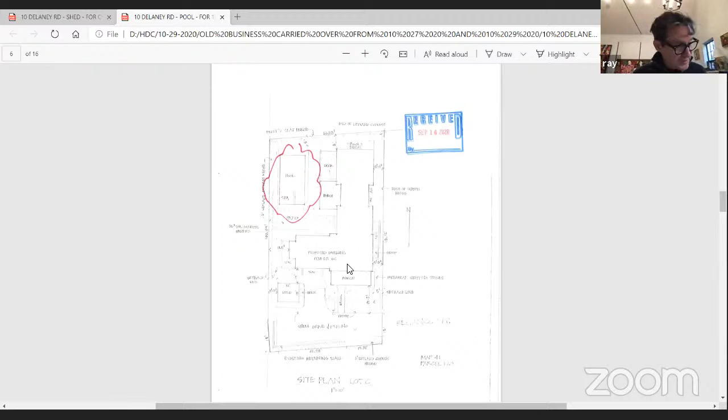Mr. Chairman, yes John, am I sitting on this? No, John, we're on old business now. I don't know whether you have your agenda in front of you, and I'm looking down because we're going to be breaking in not much longer. John, you're not on any of them. I'm not seeing you on any of the ones we're reviewing today. If I am, I'd like a comment. What's that? If I am on it, I have a comment. Well, no, John, what I'm saying is this is all old business, so the boards are already established, and I don't see you on any of the applications. Okay, no problem. Thank you. All right, okay.

All right, so the pool. Go, John. So the pool, I guess the biggest thing is that it has an automatic pool cover. Right, so how are you screening it? No fencing required, how are you screening it? And it is completely screened with...

Leyland cypress trees. You mean that exist now, or that you're proposing? No, they're proposed, this lot doesn't have anything on it right now. Those Leylands on the left are existing, as you begin to go down this private access area. Oh, those will be carried pretty much around the entire lot I'm talking about. Okay, that's unfortunate. Yeah, well, I could change it. Well, the board is getting a little tired of looking at Leyland cypresses, and they just tend to grow in a perfect line.

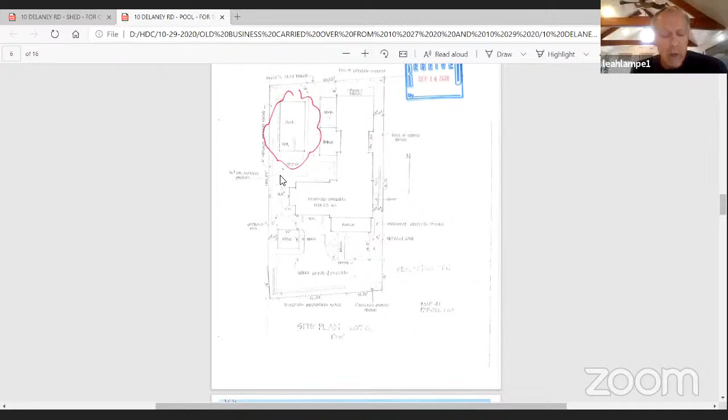Yeah, I had one earlier rendition with... what are they... Rose of Sharon hedge. Yeah, but Rose of Sharon loses its leaves. Yeah, I know, it's deciduous.

So let's hear from the board, John. Okay, yep, it's the same board that just reviewed your house. So we're going to go to Abby.

Well, I'm not in favor of a row of Leyland cypress. There's not another place for this pool, and it's already sort of... what are the dimensions, John? It doesn't look that big, but. It is 14 by 26. Yeah, that's the way we've been seeing them come in. That's a smaller size, so I wouldn't ask you to shrink it.

Deck, porch, you could put a board fence up with privet. Shoot, and which side would you put the board on? The board would have to go... well, there's one already on the north property line, and I would put it there. Oh I see, existing slat fence. That's an opaque board fence, John? Yeah, I might want to upgrade that with the lattice rail on the top, make it look a little bit better. But I could do some kind of 6-foot fence with privet on the west and north.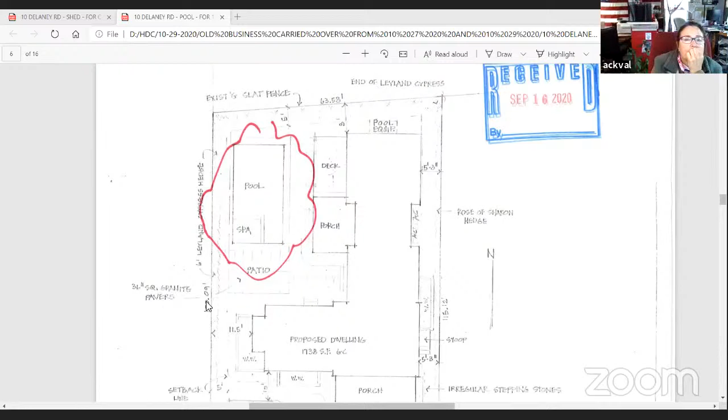Okay, so make a motion for me, Abby. So the motion is to have the slatted fence that's already existing come down that western side and stop at the edge of the dwelling, roundabout where it says 60, where that decimal point is. Correct, and then that just becomes a hedge after that to the road. Okay, privet just to the road. So that is your motion? That is my motion. Okay, on that motion, Val? Aye. Diane? Aye. Abby? Aye. And I'm in favor. Motion carries. Okay, let's look at the shed.

What is John McLaughlin laughing about? I know, I've seen him, when we started the meeting he was laughing at something. I think he's in a good watching mood. Cartoons, maybe so. We'll have to ask him.

So there's a small shed. Okay, let's take a look at it. I don't believe this should have even been reviewed or discussed at all. So John, which side of this faces down the drive? Well, that would be east. East, okay, so you're looking down the drive at a little gable with a front door on it. Correct. Okay, thanks, we'll probably be putting a trellis on this thing, that's particularly fine on the south side.

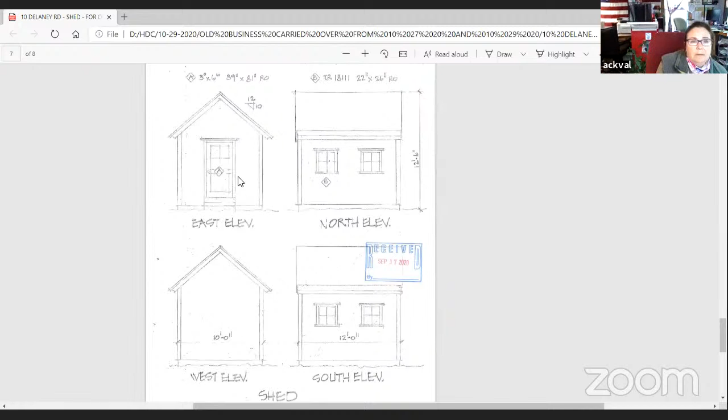Comments from the board? I would motion to approve this shed, Mr. Chair, as submitted. If anybody has any issues, it can happen during the motion, but on that motion, Abby? Sorry, I was just trying to look at the site plan. You've got privet along the front of it, John. There it is, existing retaining wall.

Yeah, well, I guess you're not going to see it. Is that correct? There's a retaining wall. I think you're going to see, no, looking down the driveway, you're going to see the corner of it. Yeah, okay, all right. The driveway's on the right. Sorry, the driveway is all along the bottom, yeah. Okay, I'm fine with it.

Okay, good. So you're in favor of Val's motion? Yes. Diane? Aye. All right, and Val? Aye, okay, I'm in favor. That motion carries.

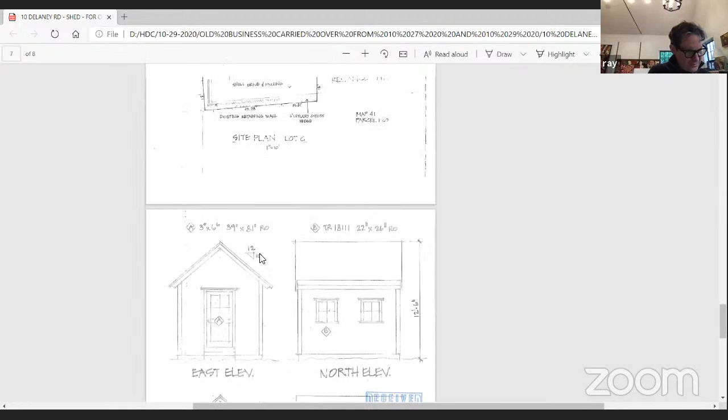Is there an easy one? There's no such thing as an easy one on old business. Why don't we, well, okay, let's just keep going and see how we do. Okay, ACK Smart, 132 Main Solar, let's go.

Hey everybody, can everybody hear me? So this board is slightly different. This is myself, Diane, Val, and Carrie. Okay, let's go. So can everybody hear me? Can you hear me, Mr. Chair? Yep, awesome. So last time we spoke about this project, we were asked to go back for revisions and

also put a mock-up on the dormers, which we did. And we put the mock-up on. I don't know if anybody went to see the mock-up, but I did take some pictures. We just saw the photo. Yep, and we also did a couple of other things. We have moved the panels on both the west and east dormers further south so that they would have even less visibility from the main road to the north.

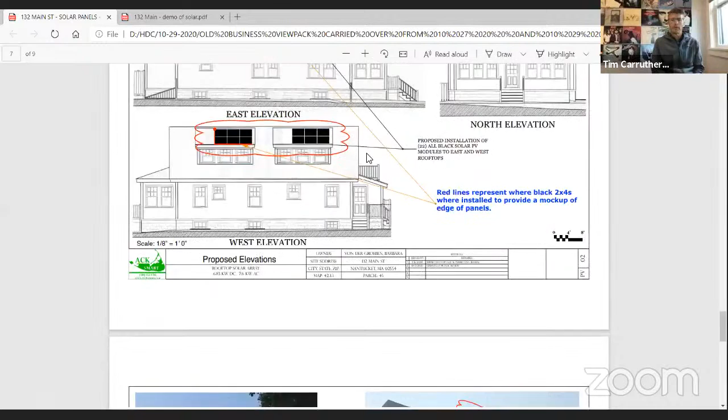So if you scroll down. Keep scrolling, I think it was a sunny day when we took the pictures. There we go. So the mock-up that we did was on the northern and side edges. We put up 2x4s painted black to simulate the profile of the panels and railings.

The other two things that we're going to do slightly differently for this project is we're going to be using a low profile rail. And since we last met, we spoke with the owner, and she is in fact going to put black shingles on the dormers, new black shingle roof on the dormers.

Just on the dormers? That was the discussion that we had, yes. That would be interesting, so you'd have two different roof shingles on your roof? Well, I think that this was driven by, it is black, but we recognize that because the roof is 15 years old, the black has faded somewhat.

Well, I guess my point is the reason that we are looking for a black roof for the panels to go on is because then everything is black, so that you don't just see black panels. So the fact that you're taking the part that already has the panels on it and turning it black, but nothing else black, is sort of defeating the purpose of the roof being black, if you know what I'm saying.

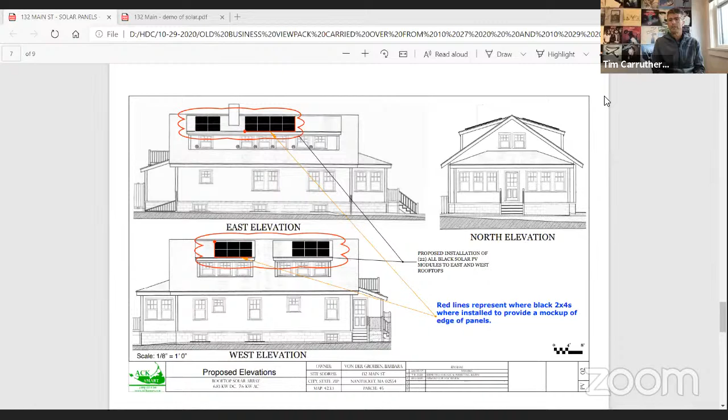If you scroll down to the next page, you can see that it's actually extremely difficult to see. It's funny, but you can see it, and that's why I was asking about moving them up, because the further away from the eave they get, the less of that you're going to actually perceive.

Yes, so a few things. Thank you, Tim, for your presentation. Holly, were you going to say something about HSAB just a minute ago?

Yes sir, HSAB did take a look at this. And they did take a look at the view, and they did say that the 2x4 was visible during the view. They recommend a setback of 1 foot off the eave line if possible. Also to stand off the section to be constructed so the panel is no higher than 2 inches off.

I guess on the specs, I think is where it was indicating. Those were their comments, so. Okay, all right, thanks. Okay, board members, and you know who you are.

Val, should I start with you? You can. I'm struggling with this because of the contrast of the roof and the panels. And I do appreciate, thank you Tim, for the offer of the black roof. I think maybe for me, if the whole entire roof was black, I could be coerced into an aye, but as it stands, I'm still a no.

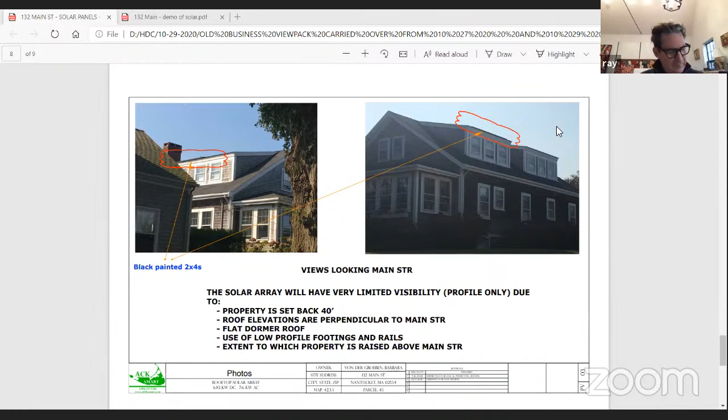Okay, that's great, thank you Val. Diane. Refresh my memory, why is he putting them on an east dormer?

Well, because the ridge runs north-south, that means his only exposure is going to be on the east or the west. I just wondered how much sun he was getting on the east to begin with. Well, it's a fairly flat roof, so the sun will be pretty good. The fact that it's a flat roof works to the advantage of getting the sun and also making it more hidden from Main Street.

Okay, I couldn't remember, I remember you had said it before, but it had gone from my mind. I think it's important, I've said before and other people have, that we do this according to our rules that govern the solar panels. I think if it moves up, I don't know from your drawing how much upper you can make the west elevation or the east elevation. It looks like if they fill the entire dormer.

So I have a question. I guess I would like to see how you are going to do that, in as much as HSAB and we have asked that it be moved up some inches so it's not visible from the edge of the roof. That's it, thank you Diane.

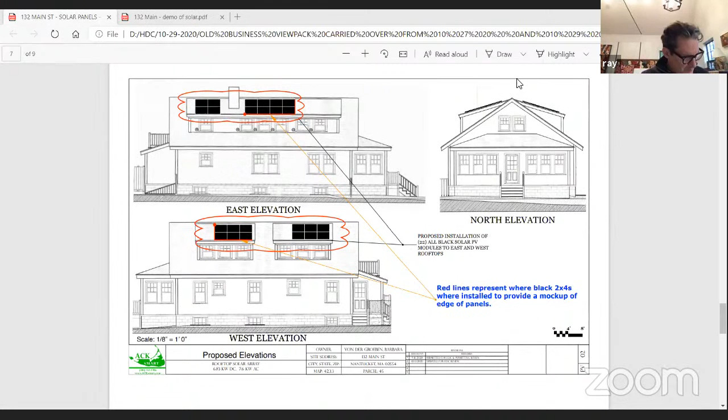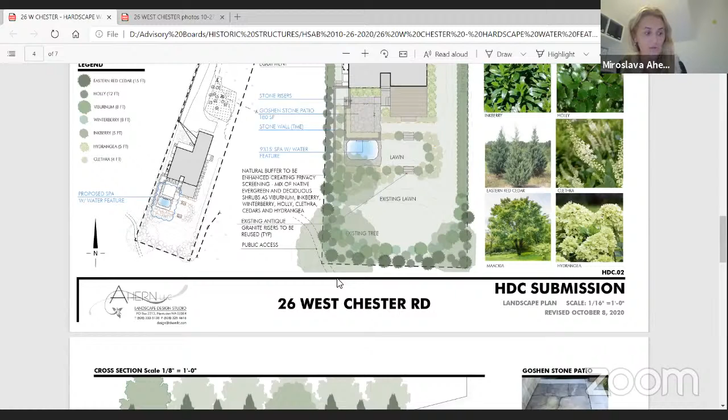I did a little research on the southwest corner. There are two lines — that's how right now the public travels to the lily pond. I did a little research, and there is no real easement on this property to access the lily pond. This is something the public just got used to, but it's not on any record, not on a registry of deeds or the Bracken survey plan. So I just wanted to point out that this access is more like trespassing — it's a public access which my client doesn't mind, but it feels a little harsh to say it's visible because people have access kind of walking through their property.

In addition, I just provided more cross-sections illustrating the planting. It's more in an illustrative way, but I just really want to show the layered volume of the planting, and again using the Goshen stones as an irregular organic material.

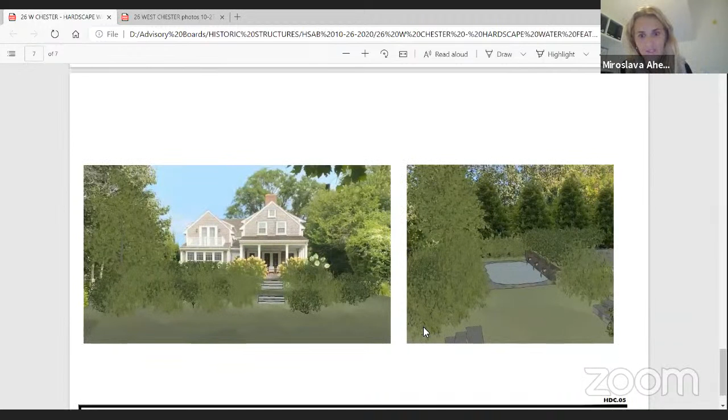I think that's all the comments or the changes I've done. Okay, okay, thank you.

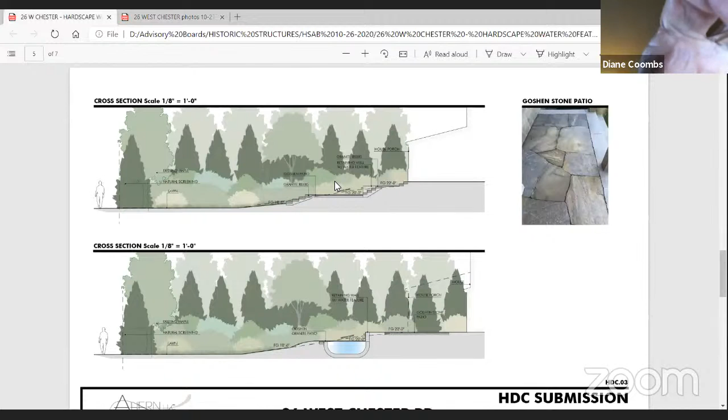Okay, thanks, Holly. Let's see, Diane, were you going to start? Yeah, I was going to ask how deep the spa was. It's 3.5 feet. It was brought to my attention that there are certain size requirements to be called a spa, and I don't see that it's going to work out, because we seem to be able to see it no matter what Mirka does.

I think the spa you could probably make disappear. I'm not sure about the water feature, and no matter where you turn, even though there's vegetation now, some of it won't be there come winter. I think it's a very difficult place to secure our particular requirements here, and maybe they have to have the spa and not the water feature. That's just a suggestion that I have.

Okay. Thank you, Diane. Stephen. Thank you, Mr. Chair. If we could flip to sheet 5, please. Yeah, it's the last one, Hal. Just so you know, I have two concerns.

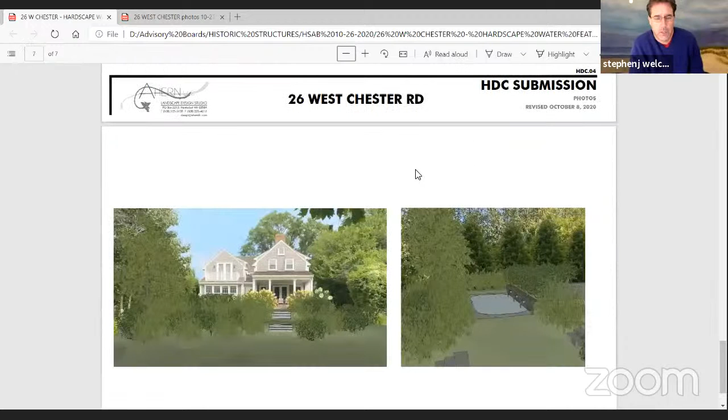One is, I agree the steps, if they could be staggered with respect to the depth as opposed to stacked, more akin to what exists now, that would be helpful because I think it softens that edge with the green showing the grass. Basically, you have small landings at the top of each of the existing steps.

The other concern is the spa and water feature will be okay there, but in the model it may just be the software, though I think there needs to be some self-editing with respect to the number and variety of plant material used for screening and the layers in terms of how deep it is. I would suggest screening that looks naturalized, or at least looks natural in place, and doesn't draw attention because of a wide variety of plant materials. To contrast that with the image, again it could just be the software, but it looks very overgrown and more dense than it needs to be. So those are my comments.

Thank you, Mr. Chair. Thank you, Stephen. How about you, Abby? Well, I think the problem lies in trying to see the lily pond and have a spa at the same time. I think it's conflicting, because if you have both, then you're going to see directly into this landscaping.

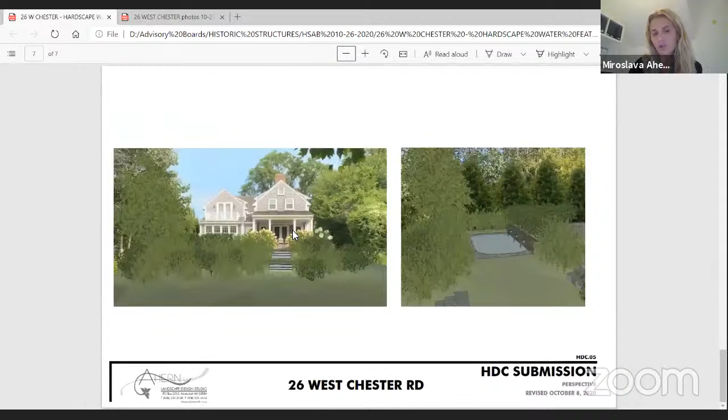Can I just have one quick comment, and I know you have to go, but I just want to bring one thing to your attention. When I show the last page, it shows a view of the property from the lawn, but not from the lily pond. I am proposing full screening along the property, as this cross section shows. This image shows how it looks if you are in the property, in the middle of the lawn. I do not expect to have a full view of the lily pond from the house. There are two layers of screening along the property line. There might be a little peekaboo view, but I'm not...

Should interrupt and make a motion to hold for revisions. You made a motion to hold for revisions? Yes, I did. Okay, thank you very much, Diane.